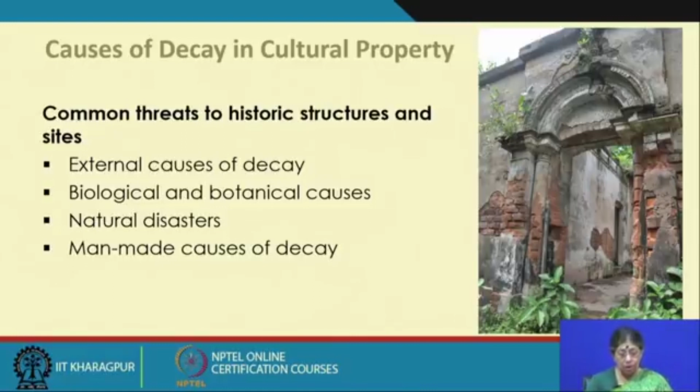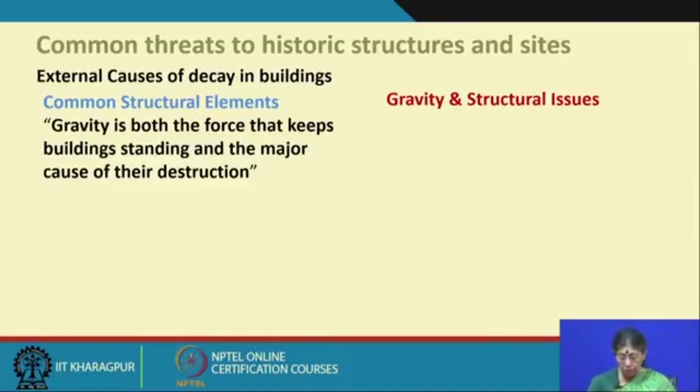Now let us talk about these one by one - external causes of decay. Let us see the common structural problems. One is gravity and structural issues. Gravity is both the force that keeps the building standing and the major cause of their destruction. So if there is any issue regarding that, the structure is likely to collapse.

For example, if you see this structure, this is Rashmancha terracotta temple. It is an ASI protected site in Bishnupur, West Bengal, and this is a huge structure with a very unique, distinctive architectural and structural system built entirely of terracotta. It is still standing because it has a very sound structural system which resists gravity. There have been minor issues which have been rectified and taken care of by ASI, but as such there is not much problem.

When we talk about gravity and related structural issues, we can preliminarily divide that into various aspects. One is the foundation - there can be problems due to the foundation, the beams, for example a stone lintel over a door or window, that can cause a problem. The arches - pointed, flat, or semicircular - also, due to either a faulty design or some later intervention, can cause a problem. The vaults, an arched ceiling, usually stone or other material, and the walls and the piers or columns - these are the basic components of a structure.

We have to analyze one by one and see what the problems are, because if there is a problem in one or maybe more than one component, there can be a serious structural issue and the building can collapse.

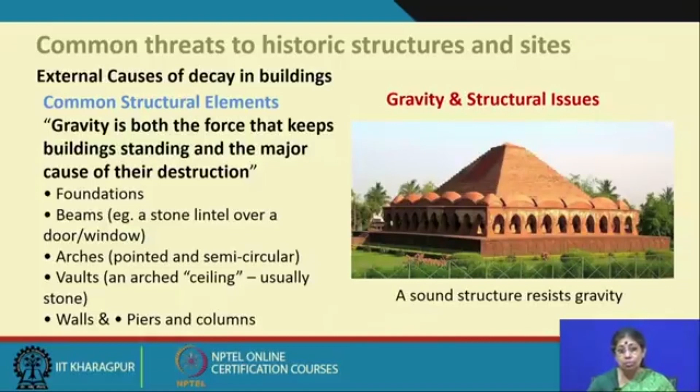For example, in this one, as you can see, this is small, and functionally both are the same, of course of a different scale. This is also Rashmancha, which is in Bengal. Rashmancha is basically a structure outside the main temple, where during Krishna and Radha's Rash festival and some other festivals, the deities are brought out into these structures, and the festival is celebrated around them - the deity comes out. I think it is a beautiful concept, this Rashmancha, that the deity comes out to the community.

A lot of design innovation has been happening around this Rashmancha. The one I talked about is in Bishnupur, which has a very distinctive architectural style, but in this case, a small village in West Midnapur, the Rashmancha has a distinctive style influenced by colonial, Portuguese architecture, with a terrace and other features. But as you can see, there is a severe problem which has happened - cracks are on the crown of the arches, and there is a lot of vegetative growth as well. So definitely there is a problem of load distribution, and if it is not taken care of very soon, the entire structure will collapse.

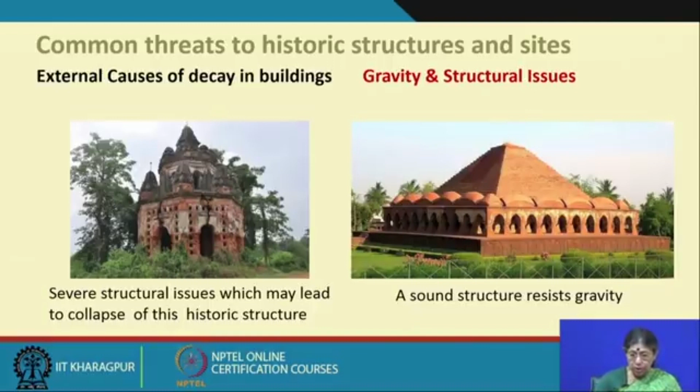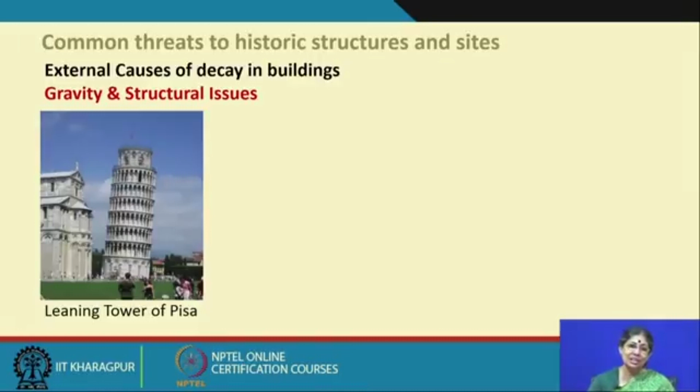We also know another well-known example, the Leaning Tower of Pisa, which attracts tourists from all over the world. Actually, this leaning of the Pisa tower is a problem, and we will take that case in detail later on. The tower was not designed that way, but it happened because of some problem - we will talk about that later, but it is definitely a structural issue and gravity problem. We also have other examples from various places - this is a leaning temple, the Huma temple near Sambalpur in Orissa, which is also called the leaning temple of Sambalpur or Orissa.

Here also, because of some gravity and structural issues, this inclination has happened, and if it is not taken care of properly, there is a probability that these structures will collapse. The Leaning Tower would collapse, but already some restoration measures have been taken up and adopted, and that is a very interesting case which probably I will cover.

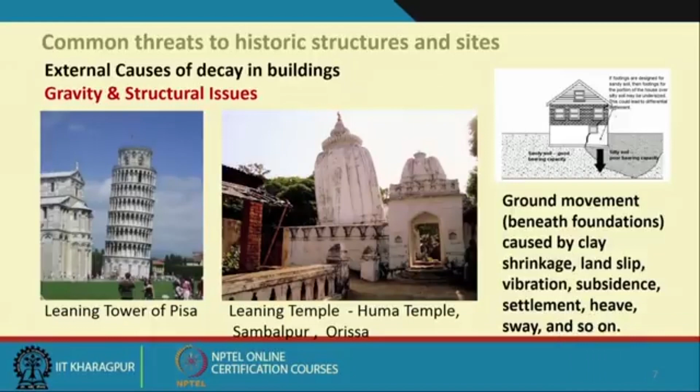Now, it is not always that there is an issue with the design of the structure. Sometimes this may be due to external causes, like ground movement beneath the foundation caused by clay shrinkage, landslip, vibration, subsidence, settlement, heave, sway and so on. So there can be various factors which change the groundwater condition or the condition of the surrounding ground beneath the foundation, affecting the gravity and stability of the structure.

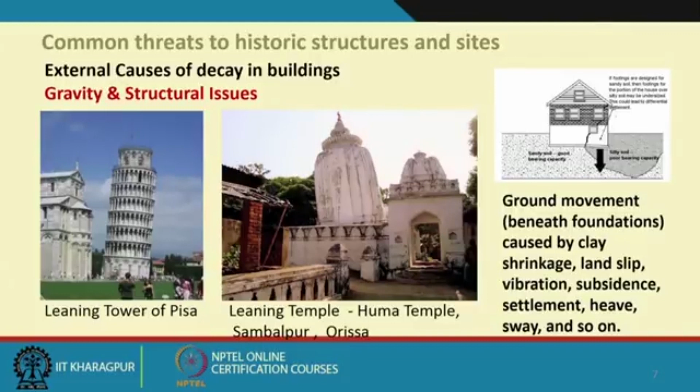Generally, when there are such issues, they will be manifested in various indications. There are various symptoms where it will be reflected. Cracks in structures, in any historic building, are actually a very good indication to understand where the issue is - this is the first step. Depending on the type of structure, the pattern and behavior of the cracks which has developed is the first indication to understand the symptoms, and of course it has to lead to further investigation.

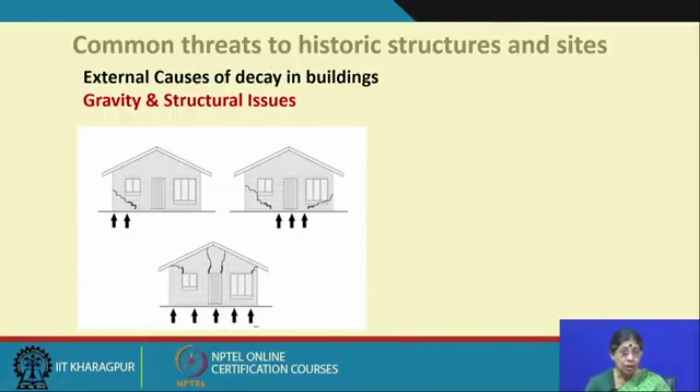As you can see, if the cracks are at the corner of the windows and the top, this problem is actually happening throughout the structure. So one can understand which location and where this is happening.

In this case, the structural cracks are caused by heaving clay - the clay has heaved and is giving an upward thrust, which is really causing the problem. Sometimes it is on one side, sometimes along the structure. These sketches illustrate what possible direction the cracks can follow. From the cracks, the direction and pattern one can understand or focus on which are the areas that have to be looked at.

What is also important is to identify where the crack started in order to determine the cause. This is one problem - the location of the crack, the pattern of the crack, and also the behavior of the crack. Now, what is the behavior of a crack? There will be cracks in all buildings - there is no such building that there won't be any crack. Now, the crack as such is not an issue.

The issue is whether it is a live crack, because after any structure is constructed, over the years it will settle, and in that process these cracks are manifestations of some sort of problem. Now, when the crack is a dead crack, meaning it is not continuing any further, then it is not much of a great issue. But when the crack is a live crack that is continuing, then this is something to be very concerned about, because it means there is some problem.

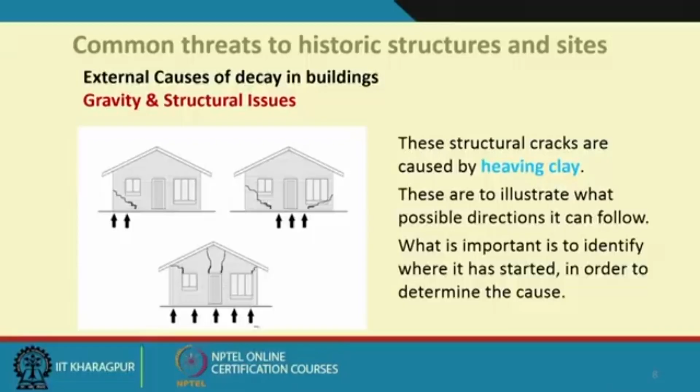So that means we have to monitor the crack - there are various ways, and probably we will see some of the ways of monitoring and understanding the crack. But before going to that, we also have to understand that cracks do not happen only because of heaving or foundation problems. Cracks in a structure can also happen due to sunlight. So one of the climatic causes we have to understand is sunlight.

The UV light is particularly damaging to organic materials such as wood, textile, pigments and other things, and it sometimes causes colors to fade and surfaces to become brittle. Another important thing is thermal expansion - the expansion and contraction, seasonal and diurnal over the time of day, which also happens to any structure. How the different components of a structure act or behave is very important to understand, as that can cause problems.

For example, in this case, as you can see, due to the sunlight the damage has taken place in the untreated wood, caused by the sun, because the wood was not in a very good state - it was untreated.

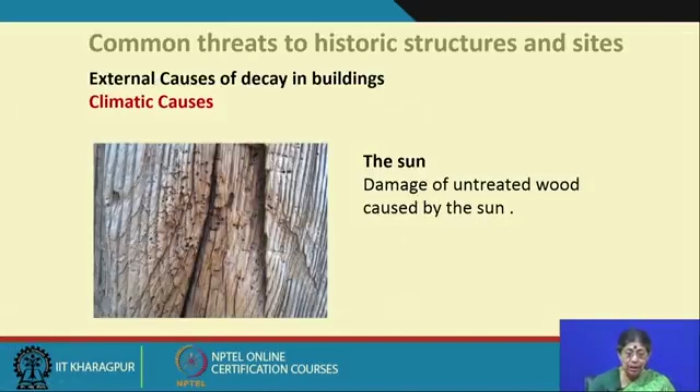So, the sunlight also can cause problems. These are various manifestations of climatic reasons. Due to sunlight, thermal expansion and other things can happen. The building materials expand when heated and contract when cooled. So there is a great temperature difference, and if the building fabric is not able to absorb it, and it happens suddenly at a very fast rate, and does not happen equally to other parts of the structure, then cracks develop.

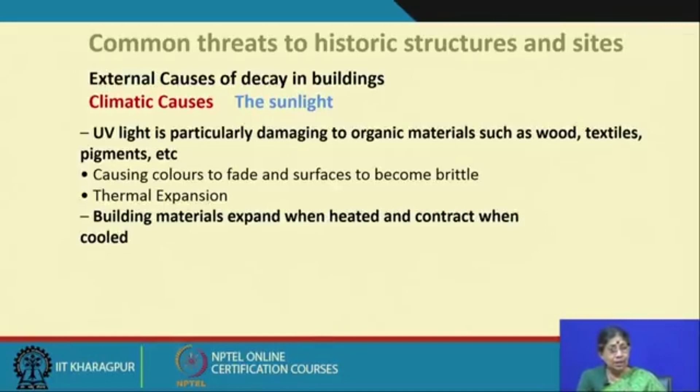This crack is a manifestation of the stretch, the stress the structure of the fabric is going through. So what happens is that when building materials expand when heated and contract when cooled, as a consequence, stresses can build up between the individual materials and the building as a whole.

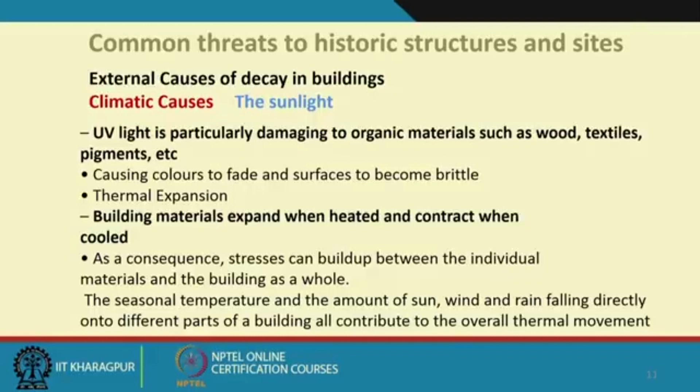It also depends on what materials actually make up that building or structure. The seasonal temperature and the amount of sun, wind and rain falling directly onto different parts of the building all contribute to the overall thermal movement. This thermal movement, and how the different components of a structure behave due to this contraction and expansion from temperature difference, is a very important aspect which has to be understood before we study structure.

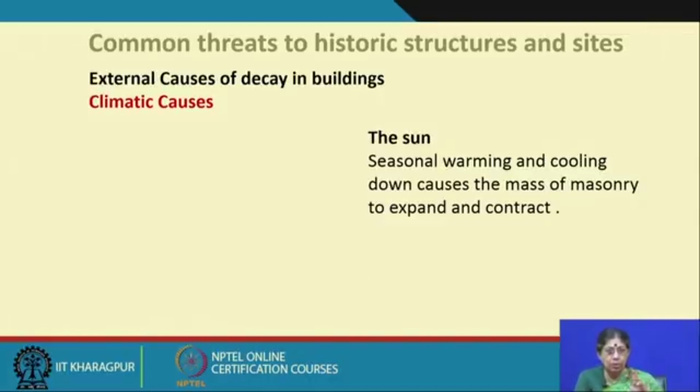The seasonal warming and cooling cause the mass of the masonry to expand and contract; cooling down and heating up actually cause the expansion or contraction. Let us see an example, because as I said, the crack is not only due to foundation problems, it can also happen due to temperature difference.

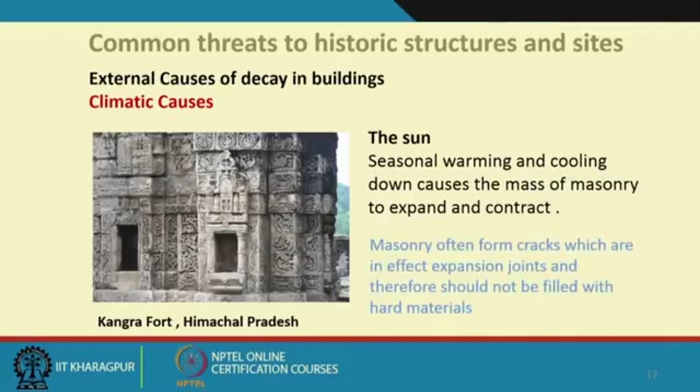This is Kangra Fort in Himachal Pradesh, and as you can see, there is a part in the Kangra Fort where some crack has developed, and this crack has nothing to do with foundation or structural failure. This type of crack generally happens because the masonry often cracks, which are in effect expansion joints. So by forming that crack, the building fabric is trying to absorb these expansions and contractions. These are, in effect, the expansion joints, and they should not be filled with hard materials.

For example, if a crack is not looking good and one decides to fill it up, especially with a very hard material like cement, then the normal expansion and contraction which was happening will not happen. If you do not give that flexibility to the building fabric, then the stress will affect other parts of the material, which can be more severe than the smaller cracks. So sometimes one has to understand what is the reason for these smaller cracks, which may just be because of climatic causes and sunlight.

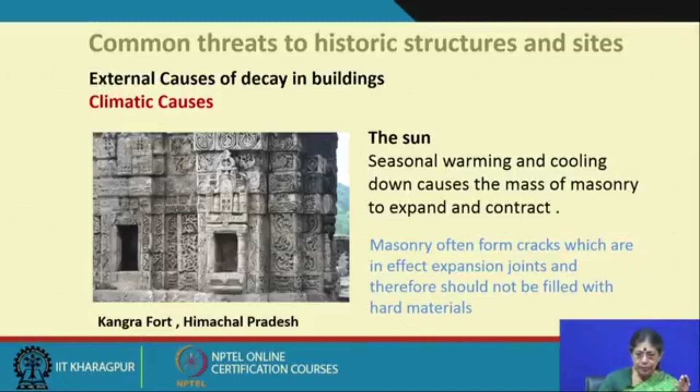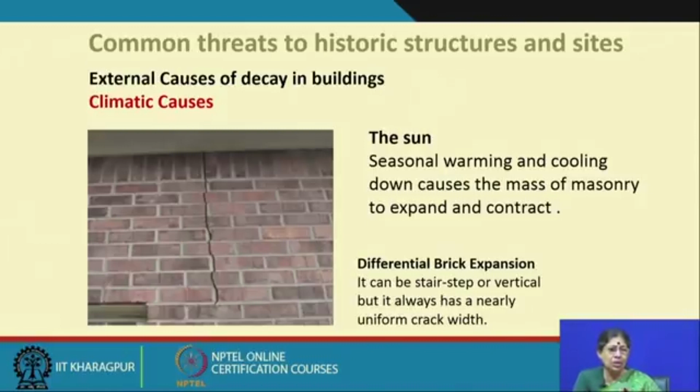This is again an example of a brick wall, where we see differential brick expansion. It can be stair-step or vertical, but always has a nearly uniform crack width. So these thumb rules help us understand the crack, the pattern of the crack, the location of the crack, and other things.

So one can fix that, and it has to be done for a longer period, because one has to understand the seasonal variation, not only the diurnal variation — how the building expands in winter time and summer time. If it follows a regular pattern, we can understand that it is just due to expansion and contraction. If there is something more, a different type of aberration, then we can say there is some added reason for that crack to become a live crack.

But whether it is a live crack or dead crack, whether it is happening in a regular pattern due to seasonal fluctuation or not, or whether other types of things are happening, that monitoring of the crack over a long period of time is very essential. The glass telltales of different types are there, and strain gauges also show much more accurately which direction the crack is moving.

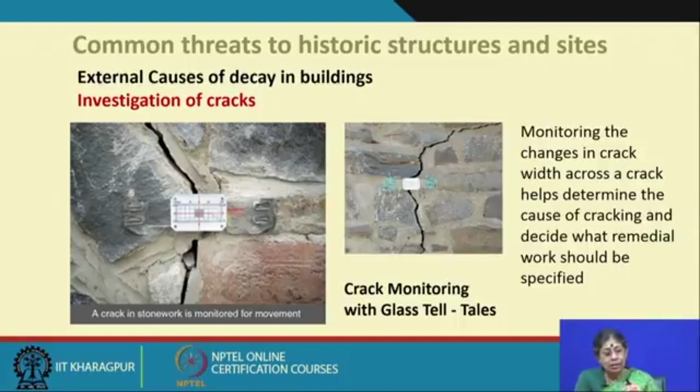So these are very good examples to monitor the crack. Before taking a decision that the building has cracks so we fill it up or do something, one has to monitor, and it takes some time and patience. Monitoring the changes in the crack width across a crack helps determine the cause of cracking and decide what remedial work should be specified. If it is a dead crack, one can simply fill up the cracks with grouting and go for consolidation. But if it is a live crack, this pattern, when recorded on a graph, shows some erratic behavior, and we must understand that it indicates a very different reason.

Now, after discussing some aspects of the sun, the external causes of decay may also be due to rain, and rain seepage, striking rain, or waterlogged areas. The rainwater can cause havoc sometimes, but one must understand, as a thumb rule, water striking the wall and such as such is not a very alarming issue in general.

What is important is that stagnant water, if it accumulates in a place, is a very severe issue. This structure, again from the West Midnapur area, was a Catholic school, now almost abandoned. You can see how water seepage, due to negligence or deterioration of the roofing material, has been happening, and it is not only causing problems to the structure but also causing seepage of rainwater and deterioration of the wooden truss members, beams, and rafters. In this particular case, it is an old mansion which is now again abandoned.

You can see the water which is supposed to go from the roof to the ground through the downwater pipe has been blocked because of the growth of trees, causing the stoppage of the flow of water, and that accumulated water is actually creating more problems. So it is not just one issue; several issues or reasons combined can cause this. Rain, specifically in areas with heavy rainfall, can cause a lot of problems and has to be taken very seriously in maintenance.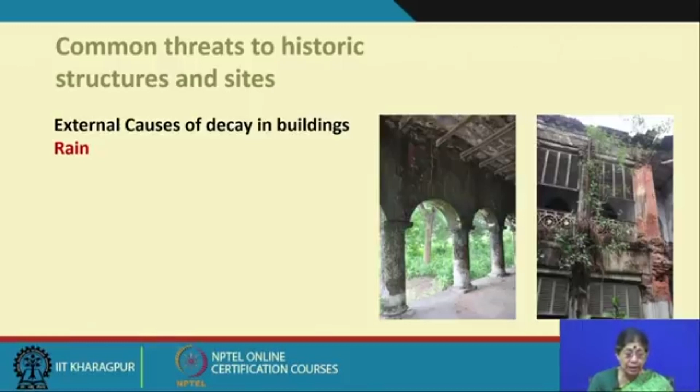Generally the common defects due to rainwater are ponds on the roof, the stagnated water, and blocked gutters and spouts. If the water flows out, there is not much problem, and it does not take much finance or heavy machinery, just regular maintenance before the monsoon comes, cleaning the gutter, cleaning the rainwater pipe. These are very important measures, because otherwise leaves accumulate and block them for some reason. If they are cleaned and water is allowed to flow, it does not cause much problem. This blocked pipe, blocked drainage system, and stagnated water on the roof can cause a very severe problem to the building fabric.

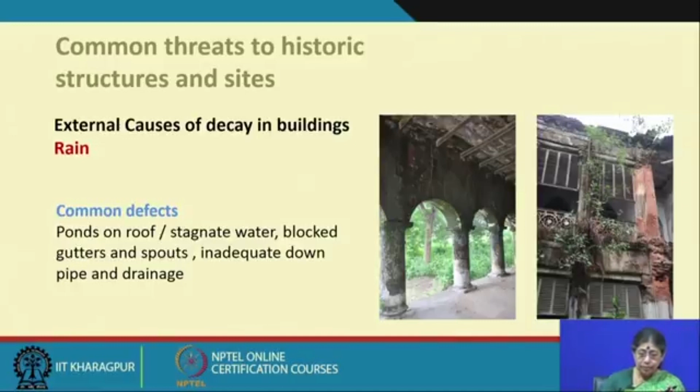As I said, the faulty disposal of rainwater is the most frequent cause of deterioration in ancient masonry. Ensuring smooth and regular disposal of rainwater, with proper maintenance, is a very important aspect, especially for masonry structures.

Now, the rainwater washing against the surface of a structure will gradually wear it away. When we talk about masonry structures, mortar and porous masonry like brick and certain types of porous stones are particularly vulnerable to this type of problem due to rain.

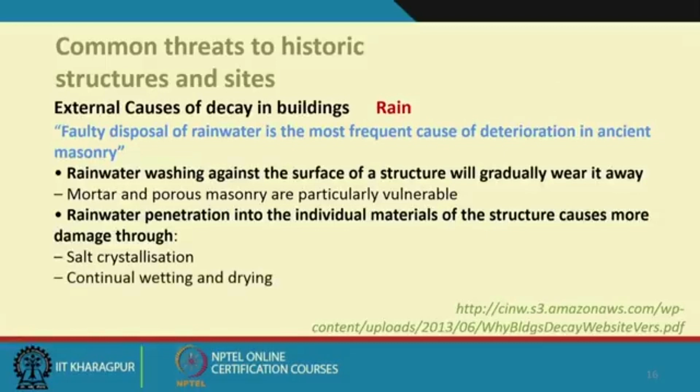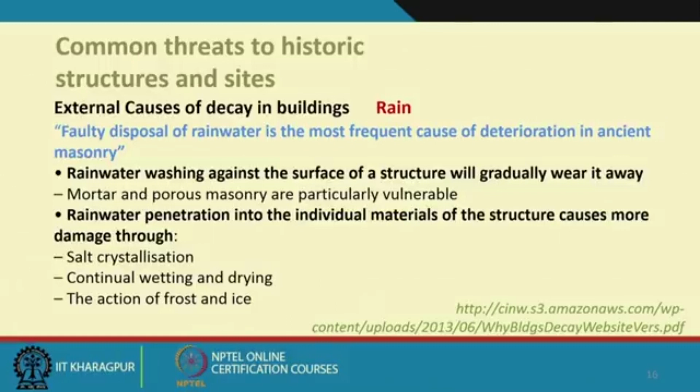Rainwater penetration into the individual materials of the structure causes more damage through salt crystallization and through the continual wetting and drying period, and the action of frost and ice. These problems due to rain, salt crystallization, continual wetting and drying, and the action of frost and ice have to be taken up independently, because each one has associated problems, and we will cover that in our next lecture. Thank you.